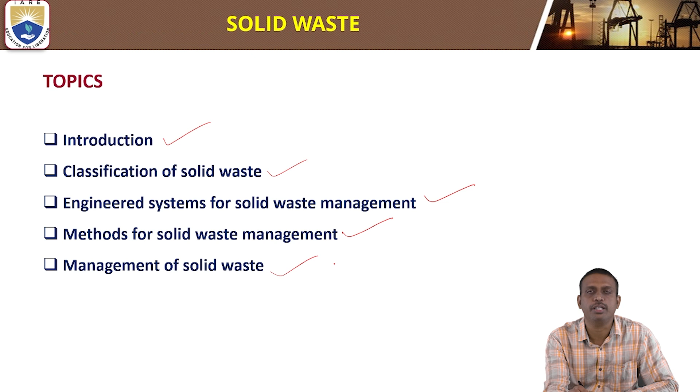Today, we are going to discuss the topic of solid waste. Topics that we are going to cover are: introduction to solid waste, classification of solid waste, engineered system for solid waste management, methods for solid waste management, and management of solid waste.

Coming to the first topic, introduction to solid waste. Waste is classified, depending on their physical state, into liquid waste, gaseous waste, and solid waste. This is what we are going to discuss in today's class. What actually is solid waste?

Solid waste is unwanted or useless solid materials generated from combined residential, industrial, economic, and commercial activities in a given area. This is called solid waste.

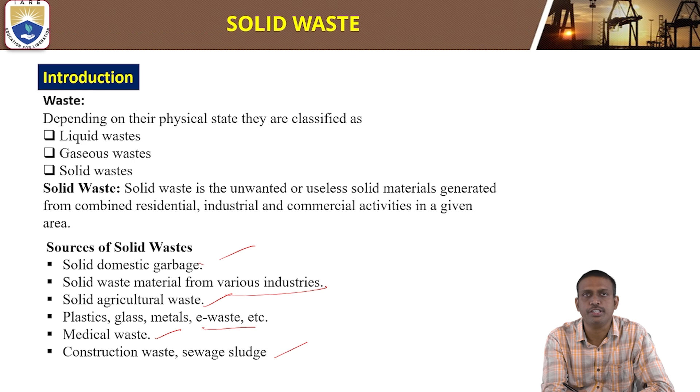What are the sources of solid waste? From where is solid waste generated? Sources of solid waste include domestic garbage, waste materials from various industries, agriculture waste, plastic, glass, metal, e-waste, medical waste, and construction waste or sewage sludge.

Coming to what actually solid waste management is. Solid waste management is a process of collection, transportation, and disposal of solid waste in a systematic, economic, and hygienic manner.

It is a process of collection, transportation, and disposal of solid waste in a systematic, economic, and hygienic manner. Another definition of solid waste management is a process of collecting, treating, and disposing of solid material that is discarded because it is of no longer use.

How is the classification of solid waste done? Solid waste is classified based on their sources of origin and based on their physical nature or physical state.

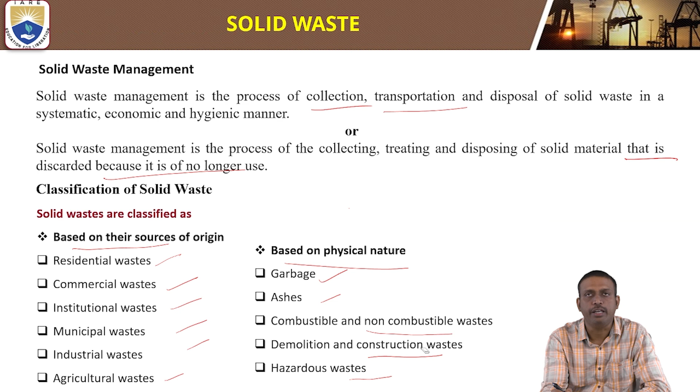Now coming to the type description, and how and where we find these sources of solid waste, the types of solid waste, how they are generated, and what are the sources of this generation.

Coming to garbage: it is biodegradable food waste, residual vegetable or animal waste resulting from handling, preparation, cooking, and eating of food. They decompose rapidly, especially in warm weather. Sources are houses, hotels, dairies, meat stalls, etc.

Second is combustible or non-combustible solid waste. Combustible solid waste includes paper, cardboard, plastics, textile, rubber, leather, wood, furniture, garden trimmings. Non-combustible solid waste includes glass, crockery, tin cans, ferrous and non-ferrous metals. Sources of this combustible and non-combustible solid waste are households, offices, hotels, market areas, etc.

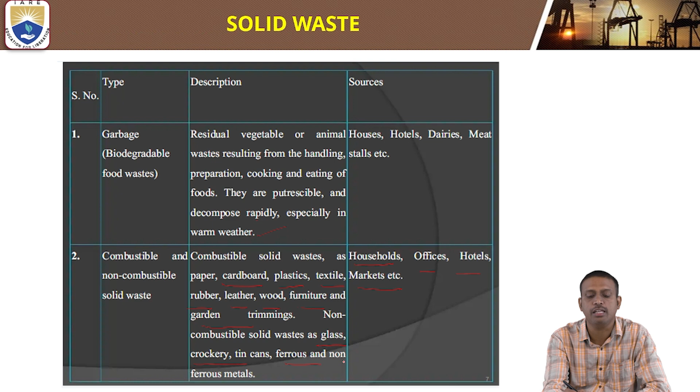These are some of the combustible and non-combustible solid waste. Combustible solid waste includes paper, cardboard material, plastic, textile, rubber, leather, wood, furniture, and garden trimmings. Non-combustible solid waste includes glass, crockery, tin cans, ferrous and non-ferrous metals.

Coming to ashes: ashes are nothing but the residue remaining after the burning of wood, coal, coke, and other combustible waste. The sources are fireplaces, kitchens, households, hotels, etc.

Demolition and construction waste is inert waste such as dirt, stones, concrete, bricks, and pieces of plumbing, heating, and electrical parts. Demolition and construction of buildings are the sources of this waste.

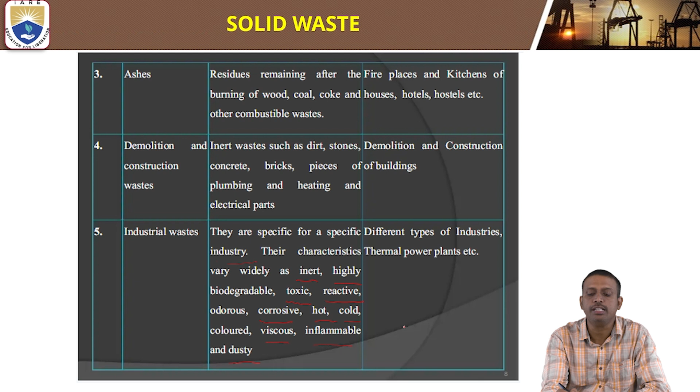Industrial waste is different from different industries, specific for the specific industry. Their characteristics vary widely as inert, highly biodegradable, toxic, reactive, odorous, corrosive, hot, cold, colored, viscous, inflammable, and dusty waste. Different types of industries and thermal power plants are examples of sources of industrial waste.

Now, next is the engineered system for solid waste management. First step is waste collection into the dustbin.

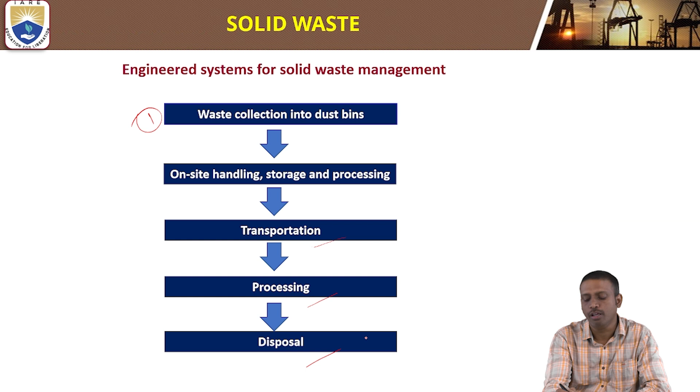The first step is collection of solid waste into the dustbins, followed by on-site handling, storage and processing. Next, we transport it from one place to another place. Then, after processing the solid waste, finally there is disposal of the solid waste.

Methods for the treatment of solid waste: there are different types of waste, so different treatment methods are applied. This treatment process has been listed below: open dumps, landfills, anaerobic digestion, composting, vermicomposting, encapsulation, and incineration. These are some of the methods for the treatment of solid waste.

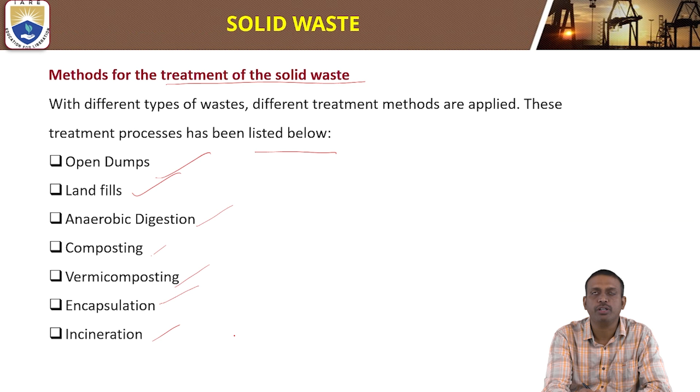What is an open dump? Open dumps refer to uncovered areas that are used to dump solid waste of all kinds. The waste is untreated and not segregated, not separated. It is a breeding ground for flies, rats, and other insects that spread disease. The rainwater runoff from the dumps contaminates nearby lands and water, thereby spreading diseases.

In some countries, open dumps are being phased out and removed because this waste contaminates nearby land and water, thereby spreading different kinds of diseases.

Now coming to landfills: landfills may refer to ground that has been filled in with soil and rocks instead of waste materials, so that it can be used for a specific purpose such as building houses. A landfill is also known as a dump or tip, the site for disposal of solid waste materials by burial.

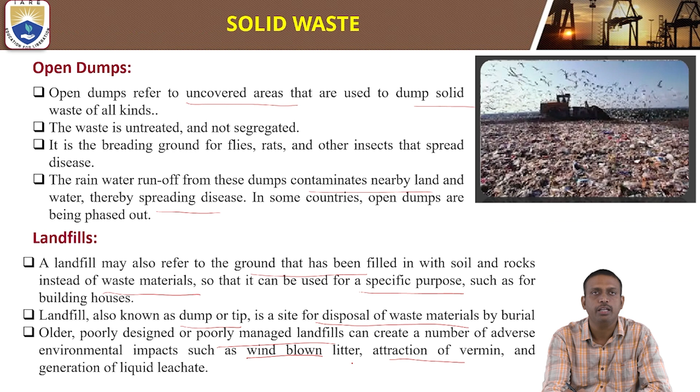Older, poorly designed or poorly managed landfills can create a number of adverse environmental impacts, such as wind-blown litter, attraction of vermin, and generation of liquid leachate. Sanitary landfills are designed to greatly reduce or eliminate the risk that waste disposal may pose to public health and environmental quality.

Composting is a biological decomposition of organic waste under controlled aerobic conditions. Industries like paper, agriculture, and food processing give out waste which is almost 100% organic. This organic matter can decompose to yield good manure.

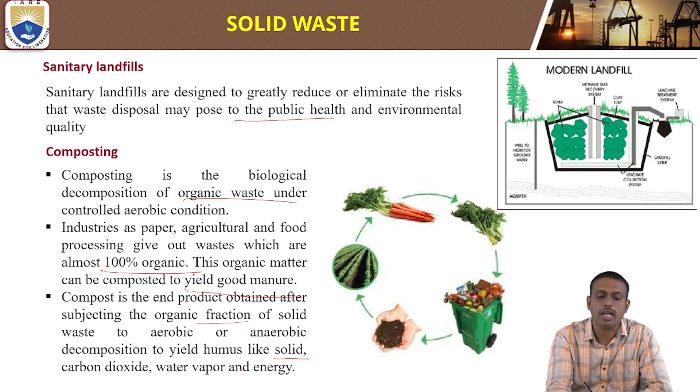What is compost? Compost is the end product obtained after subjecting the organic fraction of solid waste to aerobic or anaerobic decomposition, yielding humus-like solids, carbon dioxide, water vapor, and energy.

The different stages of composting include segregation of solid waste, separation of solid waste, processing the compostable matter, preparation of compost, digestion, curing, and screening. These are the different stages of composting.

Here, organic matter reacts with oxygen under aerobic conditions to give carbon dioxide, water, plus ammonia. Organic matter in the presence of anaerobic bacteria leads to methane, carbon dioxide, H2O, ammonia, and H2S gas.

Mechanism of composting: composting is a very complex process involving the participation of several microorganisms like bacteria, actinomycetes, and fungi. Bacteria bring out the decomposition of macromolecules, namely proteins and lipids. Besides generating heat energy, fungi and actinomycetes degrade cellulose and other complex organic compounds.

Composting may be divided into three stages with reference to change in temperature: the mesophilic stage, the thermophilic stage, and the cooling stage.

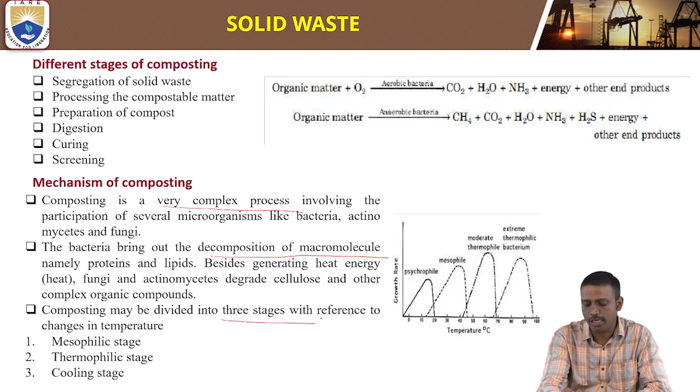What is anaerobic digestion? Anaerobic digestion is a regulated version of the natural events of landfills. It results in controlled release of methane-rich biogas, which offers the potential for a real form of energy from the waste.

This anaerobic digestion is carried out in large fermentation tanks. In this tank, solid waste is taken in the absence of oxygen. Anaerobic digestion occurs in the absence of oxygen; if it is in the presence of oxygen, that is called aerobic digestion.

We take the solid waste in big tanks, and in the absence of oxygen, anaerobic bacteria convert the large organic molecules mainly into methane (CH4) and carbon dioxide.

Unlike composting, anaerobic digestion occurs at one of three distinct temperature ranges: cryophilic, where the temperature is less than 20 degrees; mesophilic, the stage from 20-25 to 45 degrees; and thermophilic, which is greater than 45 degrees. In these stages, we convert the solid waste into methane and carbon dioxide.

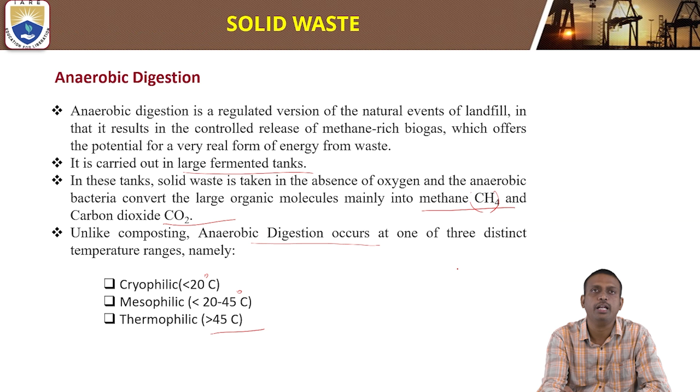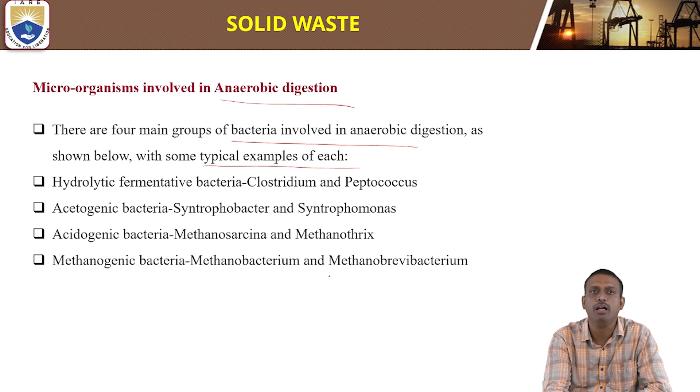There are four main groups of bacteria involved in anaerobic digestion. Some typical examples: hydrolytic fermentative bacteria like Clostridium and Peptococcus. Acetogenic bacteria like Syntrophobacter and Syntrophomonas. Methanogenic bacteria like Methanosarcina and Methanothrix, and also Methanobacterium and Methanobrevibacterium. These are some of the microorganisms involved in anaerobic digestion.

How does the digestion process take place? The digestion process involves four steps: hydrolysis, acidogenesis, acetogenesis, and methanogenesis. In hydrolysis, complex organic matter such as fats, carbohydrates, proteins, and lipids are acted on by hydrolytic bacteria, which convert them into monomer units.

In acidogenesis, examples like glucose, fatty acids, and glycerol are acted on by fermentative bacteria to produce organic acids like acetic, butyric, and propionic acids, alcohols, and ketones. In acetogenesis, acetogenic bacteria convert these into acetates, carbon dioxide, and water. In methanogenesis, methanogenic bacteria produce methane, carbon dioxide, and H2O.

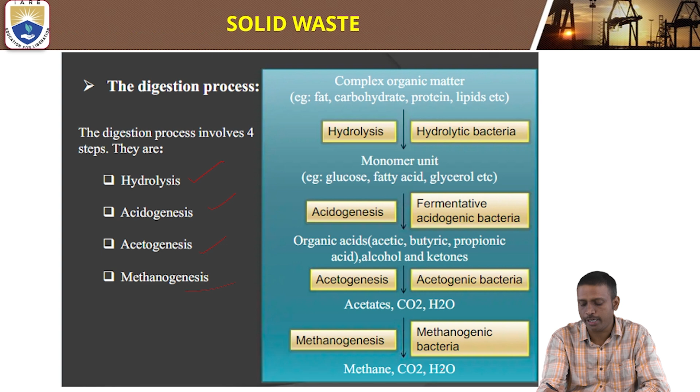What is vermicomposting? Vermicomposting is a simple biotechnological process of composting in which certain species of earthworms are used to enhance the process of waste conversion and produce a better end product.

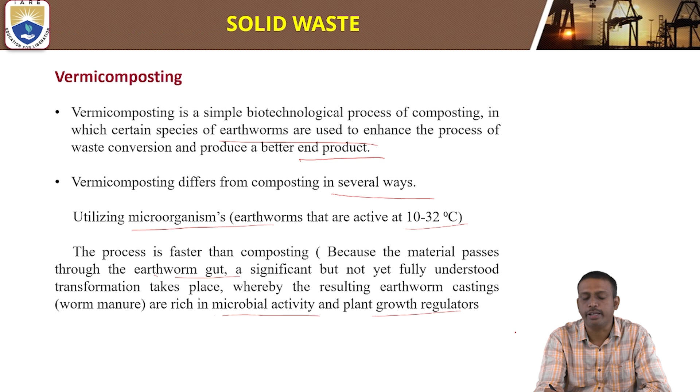Vermicompost differs from composting in several ways, utilizing microorganisms and earthworms that are active between 10 to 32 degrees. The process is faster than composting because the material passes through the earthworms, and a significant but not fully understood transformation takes place, resulting in earthworm castings, or worm manure, which are rich in microbial activity and plant growth regulators. This is how the vermicomposting process works.

Encapsulation is a process where solid particulate waste material is coated with a thermosetting resin, which is compressed and cured to form a rigid core. The rigid core is then coated with a flexible thermoplastic resin to provide a sealed, encapsulated waste that can withstand moderate compressive loads.

Encapsulation methods are of two types: micro encapsulation and macro encapsulation.

Incineration is the most common thermal treatment process. It involves burning waste at a temperature of about 1000 degrees in the presence of oxygen, so as to eliminate all odors and ensure good combustion. After incineration, the waste is converted into carbon dioxide, water vapor, and ash, converting hazardous organic substances into less hazardous components.

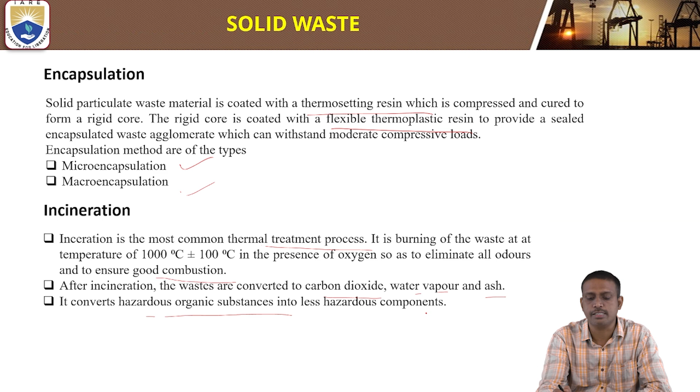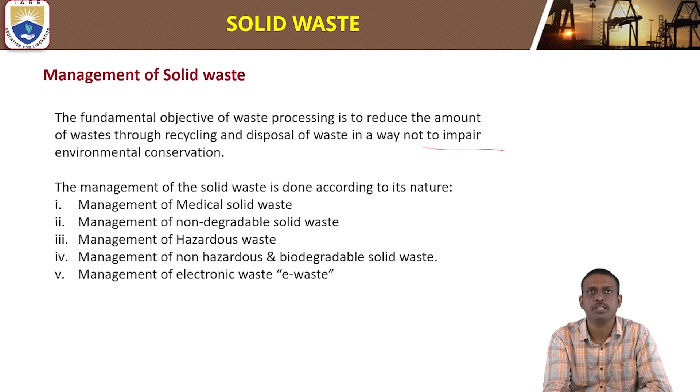Coming to the management of medical solid waste. The fundamental objective of waste processing is to reduce the amount of waste through recycling and disposal of waste in a way that does not impair environmental conservation. The five types are: management of medical solid waste, management of non-degradable solid waste, management of hazardous waste, management of non-hazardous or biodegradable solid waste, and management of electronic waste or e-waste.

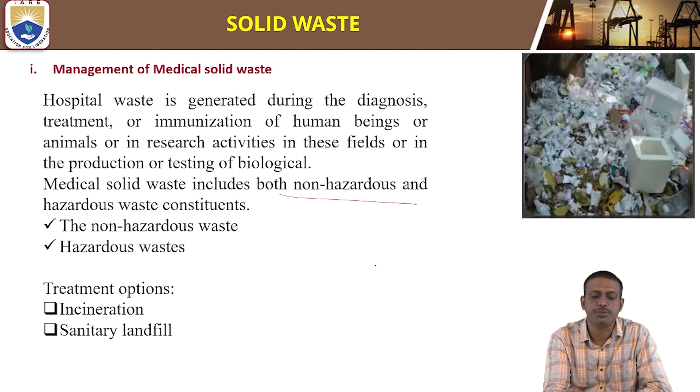What is management of medical solid waste? Hospital waste is generated during the diagnosis, treatment, or immunization of human beings or animals, or in related research activities, or in the production or testing of biologicals. Medical solid waste includes both non-hazardous and hazardous waste constituents. Treatment options include incineration and sanitary landfills.

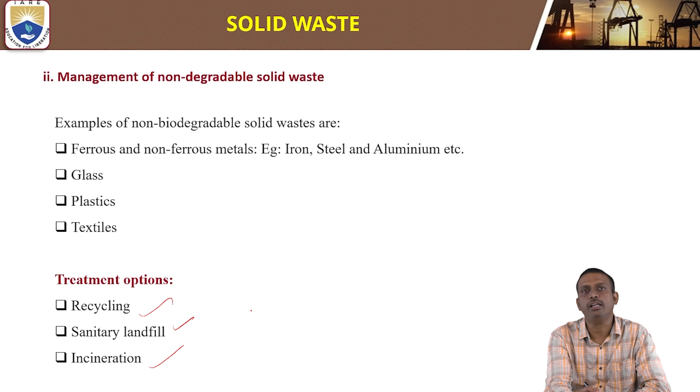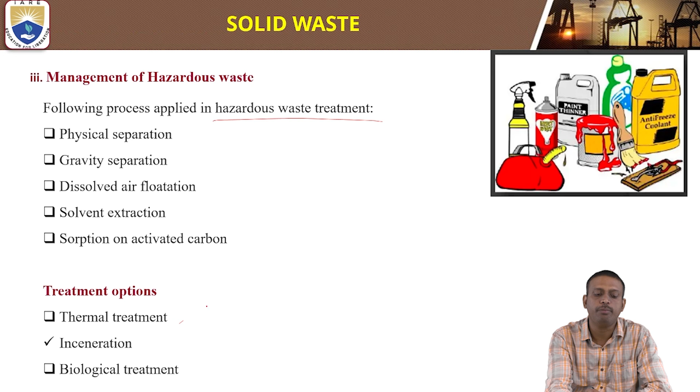Management of hazardous waste: the following processes are applied in hazardous waste treatment: physical separation, gravity separation, dissolved air flotation, solvent extraction, and sorption on activated charcoal or activated carbon. Other treatment options are thermal treatment, incineration, and biological treatment.

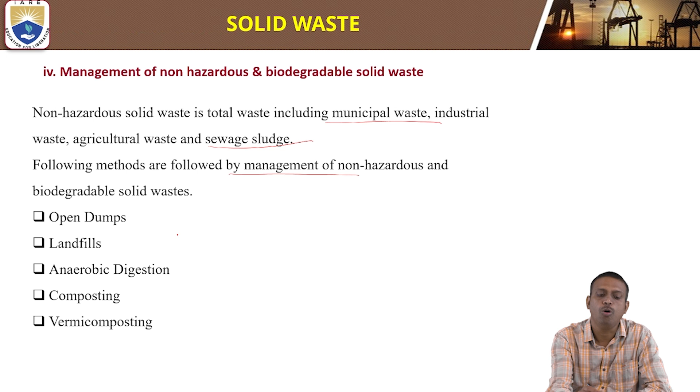Management of non-hazardous and biodegradable solid waste. Non-hazardous solid waste is the total waste including municipal waste, industrial waste, agriculture waste, and sewage sludge. The following methods are followed for management of non-hazardous biodegradable solid waste: open dumps, landfills, anaerobic digestion, composting, and vermicomposting.